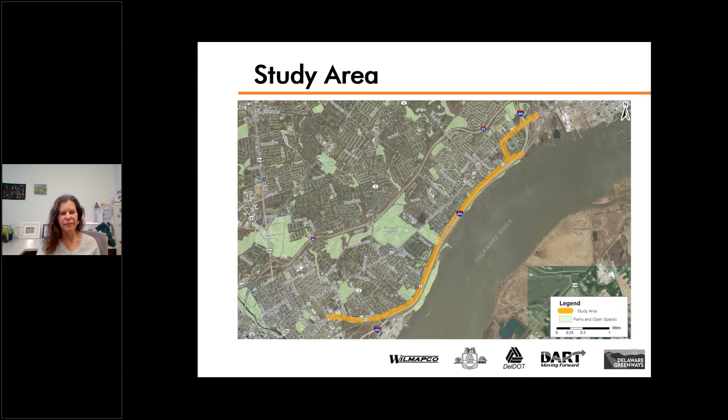WILMAPCO is the managing agency for the study, but we're certainly not doing this alone. We're working in partnership with DelDOT and Delaware Transit Corporation, the transportation providers along the corridor. New Castle County Department of Land Use is part of our team as the land use agency for the area. And Delaware Greenways is part of this, with an interest in connecting the East Coast Greenway through the corridor, as well as possibly connecting Fox Point State Park and Bellevue State Park by walking and biking.

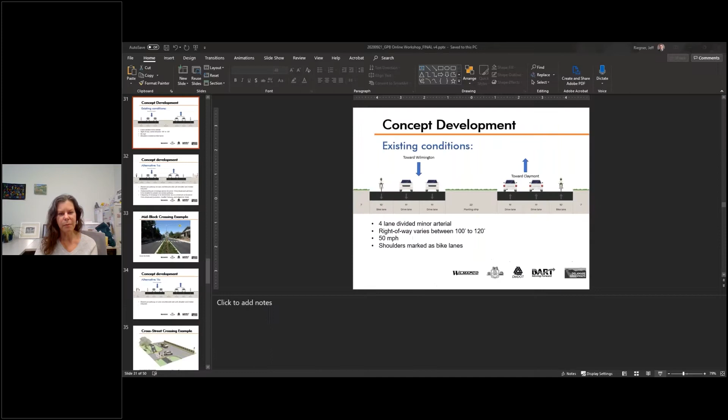We're also coordinating with other organizations working along the corridor, such as regional civic associations, Chamber of Commerce, East Coast Greenway, and municipalities along the corridor. But most importantly, we're coordinating and reaching out to people who live, work, and own property in this area. We're doing this through an advisory committee made up of all these different groups, as well as through public workshops.

The purpose of the study, basically, is to look holistically at the study area to see what the corridor's current and future needs are, and then develop recommendations that will address these future and current needs. We're using your feedback as well as technical analysis to look at what the options are for meeting those needs and what are feasible and best meet the community's interests.

We've been at this for a while now. We began our process last summer, looking at current conditions and existing issues along the area. Then we had a community visioning process that included a November bus tour with the advisory committee. In January, we held a public workshop, and many of you were there. It was wonderful. Then in February, we had an online survey to follow up from the public workshop.

Since then, we've been working to identify some initial options for analysis. We took a further look and refined the options, and we'll be presenting those options to you tonight for your feedback. After that, we'll use your feedback to select the preferred concept and develop a final report that will be available later this fall. With that, I will turn it over to Leah Casanda, who is part of our consultant team, to talk more about what we heard through the outreach process.

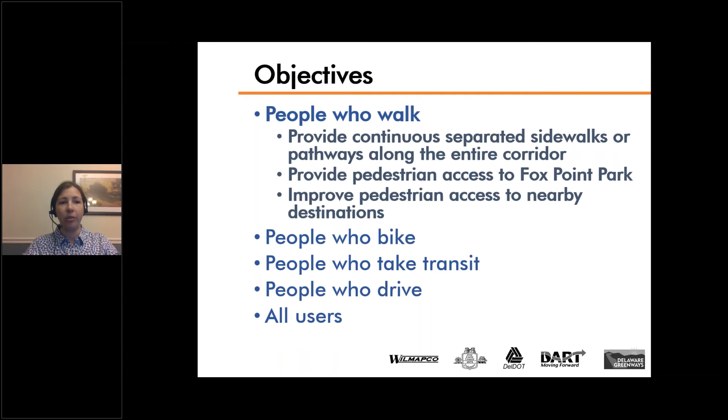The information from the first meeting and the February survey, including the presentation, boards, and feedback, are available on the project website. Based on the feedback received at the public workshop, from the online survey, and from members of the Advisory Committee and Management Committee, the following objectives were developed for each user group. Objectives for people who walk include providing continuous sidewalks or pathways along the entire corridor, as well as access to Fox Point Park and nearby destinations.

Objectives were similar for people who bike: providing low-stress bike facilities or facilities physically separated from traffic along the entire corridor, as well as improving access to nearby destinations.

For people who take transit, the objectives are providing additional bus stops and shelters along the corridor, as well as improving access to the Claymont train station.

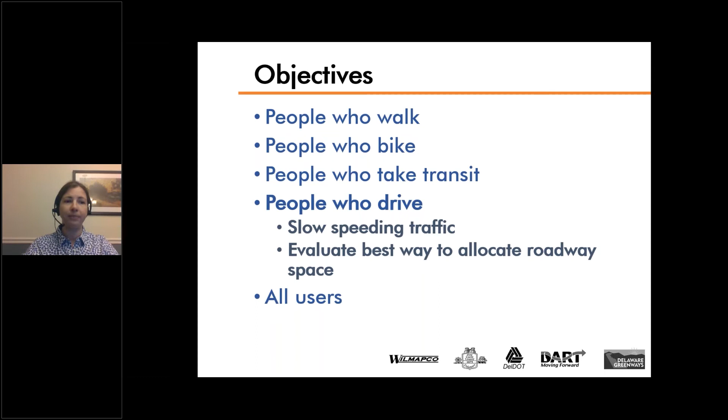For people who drive, we're looking at speeding traffic and determining the best way to allocate roadway space. And lastly, objectives for all users include improving lighting, greening the corridor, and improving stormwater management.

Now Mike will share the alternatives that were developed to meet all of these objectives.

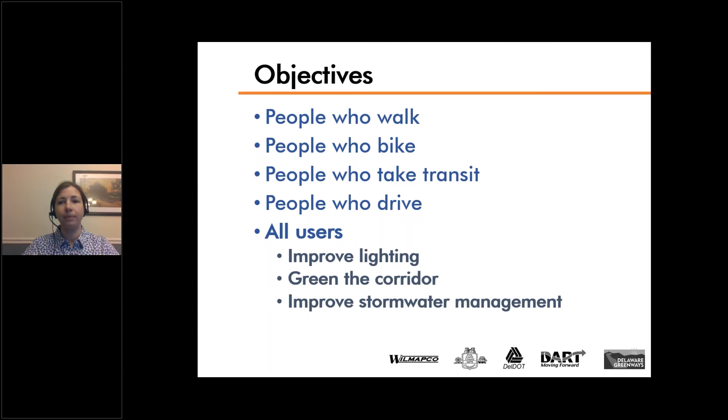Thank you, Leah. Good evening, everyone. My name is Mike Campbell, I'm a landscape architect with WRA, and I'd like to briefly walk you through the existing conditions and the alternatives that have been developed based on the feedback we heard during our first public workshop.

As Heather described, our project area extends from the city of Wilmington limits at the southern end of the corridor to the new Claymont Transportation Center to the north via Governor Printz Boulevard and Philadelphia Pike. The total corridor is a little over 6 miles long and is flanked by a mixture of residential, commercial, and retail land use to the west and I-495, Amtrak, and the Delaware River to the east.

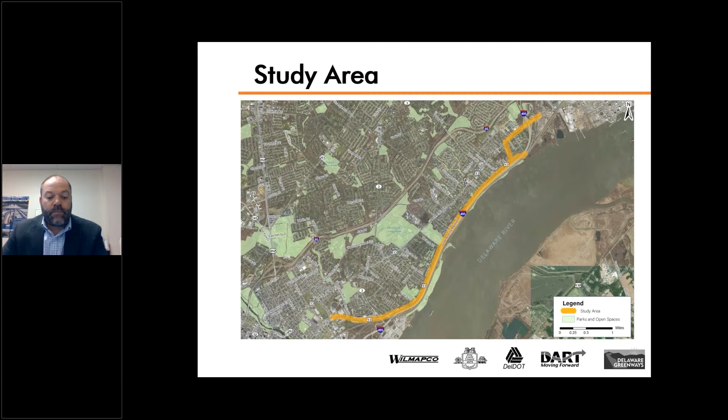There are existing sidewalks scattered along the corridor, however there's not a continuous pedestrian connection. The shoulders vary in width and are marked as on-road bike facilities in both directions for the entire length.

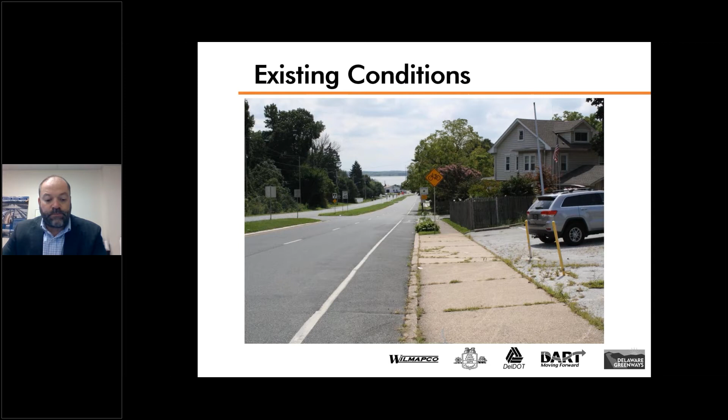Governor Printz Boulevard is a divided roadway by a grass median which varies in width and provides left turn lanes and vehicle crossings for northbound traffic. There are extensive overhead and underground utilities throughout the corridor, which have been considered in the development of the alternatives.

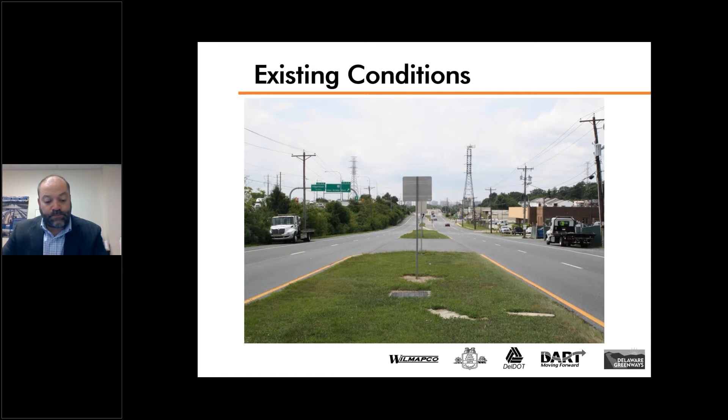There are many destinations along the corridor, including the retail shopping at Merchant Square. This shopping center currently has one of the few grocery stores accessible to residents in Northeast Wilmington and the Bellefonte neighborhoods.

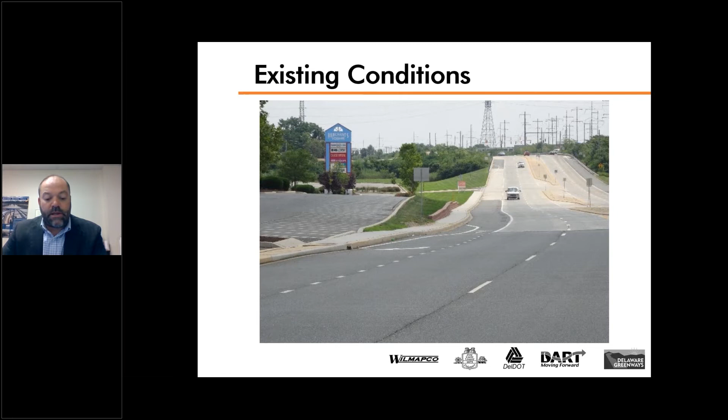There are many planned projects adjacent to and directly within the corridor that were taken into consideration during the development of the alternatives. Several of these projects will create new destinations and increase demand for alternative transportation options. While we know what the specific impacts to the corridor will be for some of these improvements, others, such as the port development, are still being planned, and there may be opportunities to incorporate recommendations from this study.

As Leah described, one of the key considerations we heard from the public is the importance of making a direct connection to Fox Point Park. Fox Point Park is a 100-acre state park situated along the west bank of the Delaware River. The park offers scenic views, wildlife views, picnic areas, playgrounds, and if you haven't been there when a large container ship is coming up the Delaware River, it's quite impressive.

The park is an underutilized asset due to the remote location and is virtually only accessible by car. As part of this study, we looked at two potential feasible connections, one at Stoney Creek and the other at Edgemoor Road, which both have significant challenges.

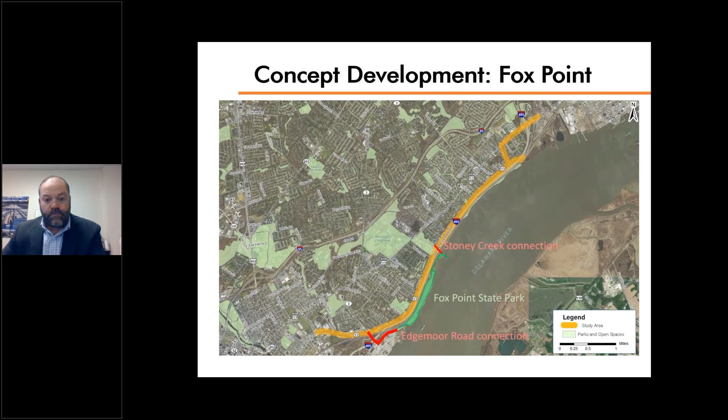Stoney Creek is a small tidal tributary to the Delaware River located just north of Cauffiel Parkway. The creek is spanned by several major transportation entities, including I-495, Amtrak, High-Speed Rail, and Norfolk Southern Freight Rail. While some of the overhead structures meet trail standards, which require a 10-foot minimum overhead clearance, many of them would require significant excavation. In addition to the extreme difficulty of just coordinating with these major transportation facilities, the largest challenge we see is the narrow opening you see here at the mouth of the creek.

Being tidal, the trail would flood twice daily, requiring significant signage or possibly digital flood monitoring stations to alert users of the potential hazard.

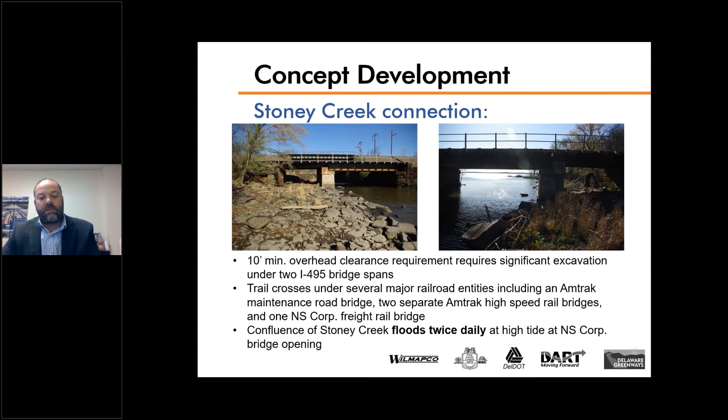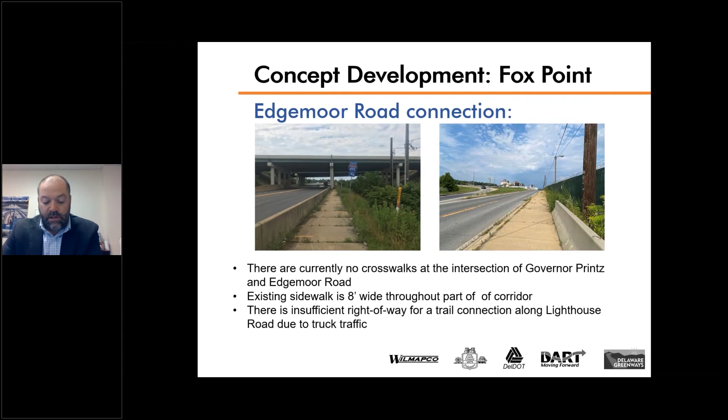The second connection at Edgemoor Road also has significant challenges. While the connections from Lighthouse Road to Governor Printz Boulevard require relatively minor improvements, the primary challenge is the limited right-of-way along Lighthouse Road, which creates an unsafe area with heavy truck turning movement and storage. The at-grade skewed railroad crossing also limits the ability to provide safe pedestrian access to the park.

The alternative shown here would provide direct access from the proposed pedestrian and bicycle improvements on Governor Printz Boulevard along a widened sidewalk on Edgemoor Road to a new off-road connection shown in purple on the west side of Lighthouse Road. To avoid I-495 ramp conflicts, railroad right-of-way conflicts, and truck movements, this section is either proposed to be an elevated structure extending on the east side of Lighthouse Road or potentially looping around the west side of the asphalt plant as shown in orange.

A new perpendicular at-grade crossing of the railroad to the north would allow safe access to the park. As you can see, there's a reason why this pedestrian connection has not been done before. It's very challenging.

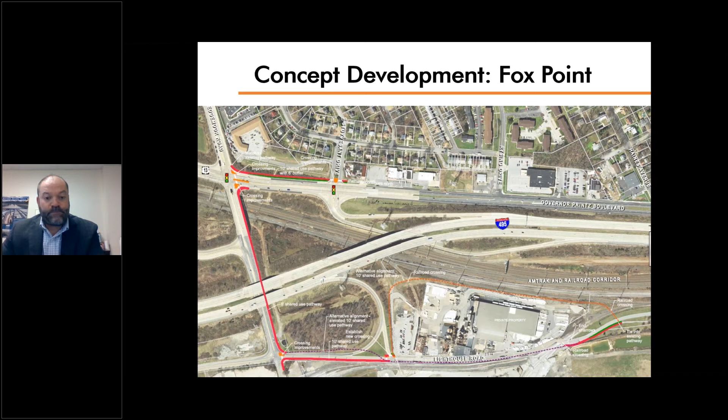Okay, so now's the time everyone should really pay attention, as there's going to be a short poll. We'll be asking the audience for their feedback following the presentation of the Governor Printz Boulevard alternatives.

As a quick recap, the existing condition of Governor Printz Boulevard is a 4-lane divided highway with a right-of-way varying between 100 to 120 feet wide. There are paved shoulders on both sides of the highway, and the grass median varies in width. There are 3 alternatives developed with variations that show improvements on both the northbound and southbound direction.

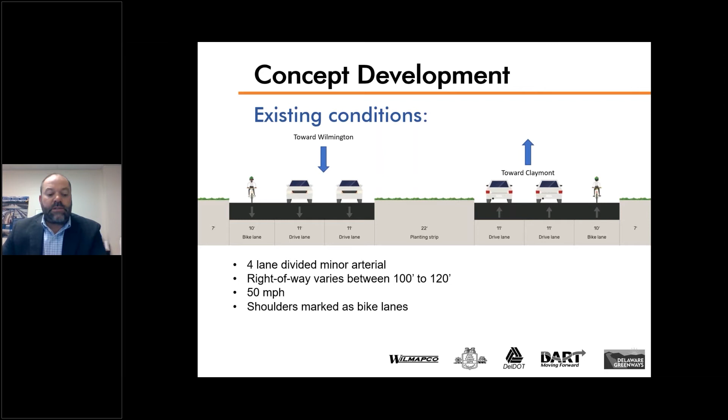Alternative 1A maintains 2 lanes of traffic in both directions, shoulders marked as bike lanes, and a new shared use pathway on the northbound side of the roadway. This alternative minimizes conflicts with vehicles. However, the trail will only be accessible by designated crossings of Governor Printz Boulevard. In addition to the trail, a sidewalk connection on the southbound side would provide additional pedestrian connections. This alternative requires a conversion of a portion of the median to new roadway.

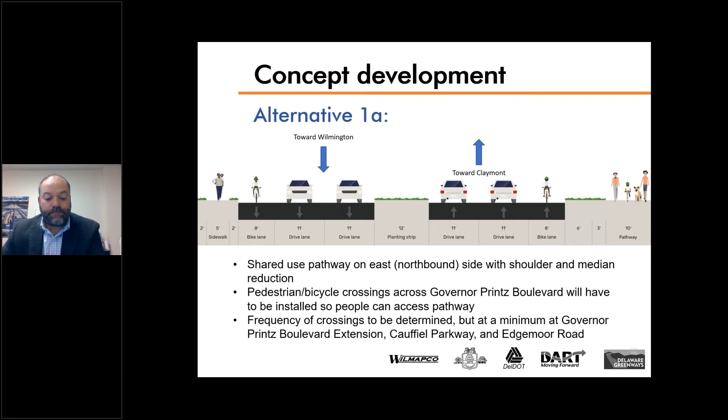For this alternative, the addition of enhanced pedestrian crossings will be evaluated for key unsignalized intersections such as Cauffiel Parkway.

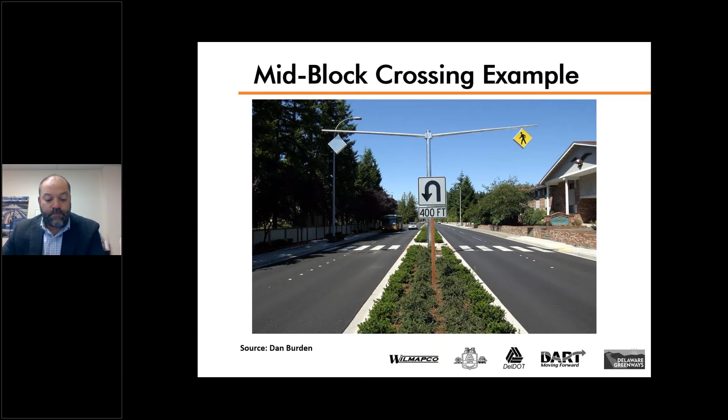Alternative 1B also maintains 2 lanes of traffic in both directions, with shoulders marked as bike lanes. However, the shared use path is located adjacent to the southbound travel lanes. This alternative also requires a median reduction and new roadway construction. Because the pathway is on the southbound side, it is more accessible to the adjacent land uses. However, it also creates more conflicts between path users and vehicles at roadways and driveways.

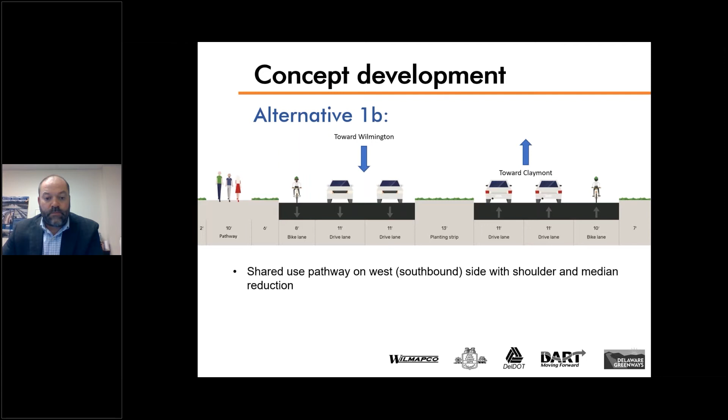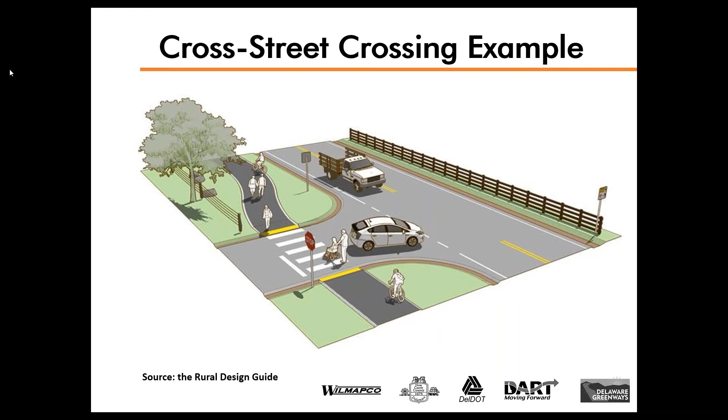Some of the pros and cons of alternative 1A and 1B: Alternative 1A provides direct access to Claymont Transportation Center as well as Edgemoor. However, users have to cross Governor Printz Boulevard to access the pathway. Alternative 1B provides direct access for more users. However, there are 57 driveways and 26 unsignalized intersections that increase user conflict between vehicles and pedestrians.

Alternative 2A is a lane reduction alternative that relocates both travel lanes to the southbound or west side of the roadway. Similar to alternative 1A, the shared use pathway would be on the northbound side with ample room for larger buffer and opportunities for additional trail amenities or even separated pedestrian and bike facilities.

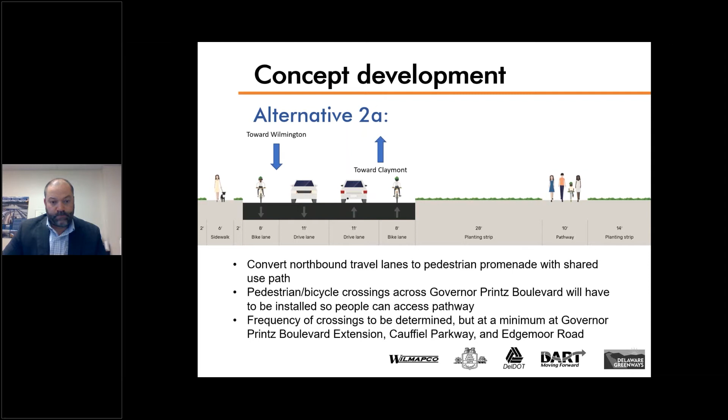Alternative 2B is also a lane reduction, but the shared use path and potential pedestrian promenade would be adjacent to the southbound side of the roadway. This would allow direct access and eliminate having to cross the boulevard. However, there would be significant improvements needed to address the high number of user conflicts with adjacent roads and driveways.

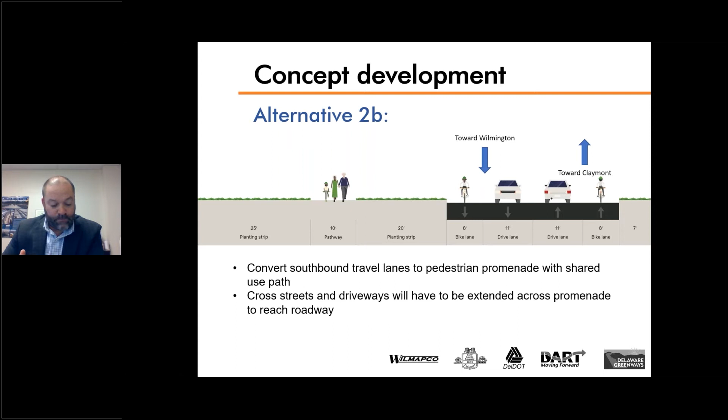To recap alternatives 2A and 2B, they have the same pros and cons as alternatives 1A and 1B, with similar accessibility and user conflicts. However, 2A and 2B are relatively lower cost to implement due to not requiring new roadway construction.

The final alternative is also a lane reduction in both directions. This option provides a shared use path on both sides of the roadway and maintains existing median and left turn lanes. Similar to other alternatives, the shoulders would be maintained as on-road bike facilities. This alternative maintains the wide boulevard feel for drivers and pedestrians alike.

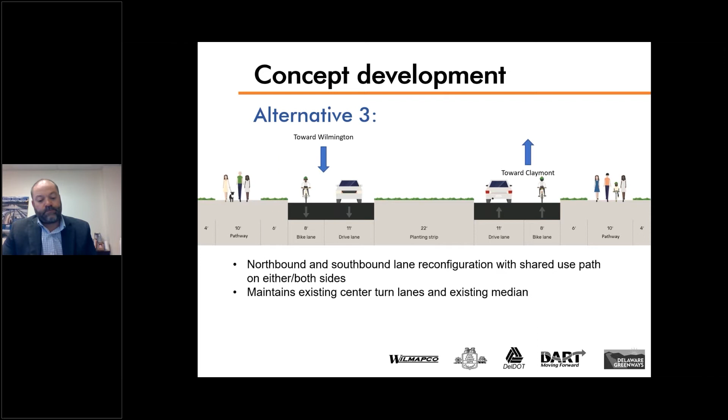Alternative 3 creates enough space for pathways on both sides of the roadway. This allows walkers and people who ride bikes to use the west pathway for short local trips and the east pathway for through trips or recreational rides. Crossings would still be required at major intersections.

It should be noted that alternatives 2A and 3 have the potential for a low-cost interim implementation, which would allow the project to be implemented on a much faster track.

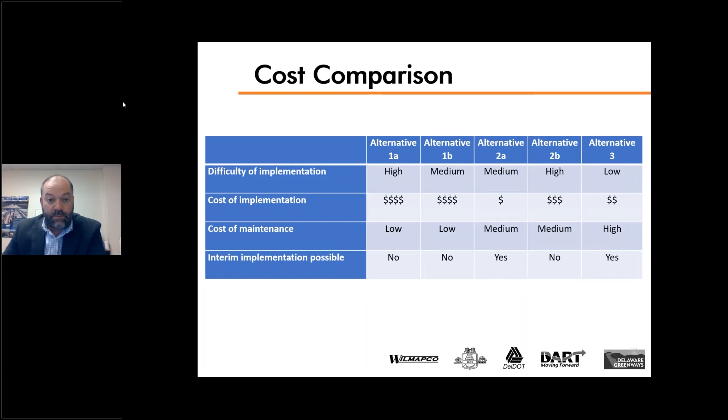Another factor that had to be considered as part of the alternative development is the impacts to traffic. Using existing traffic data and new traffic intersection counts, we were able to determine the travel times for morning and evening commute during the peak hours.

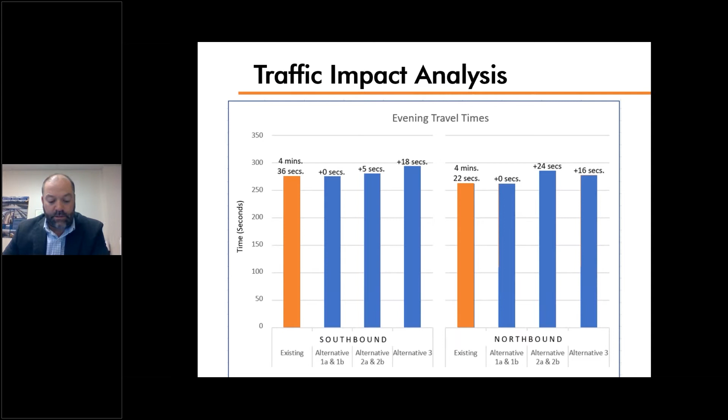Thanks, Mike. I'll encourage all of you attendees to take a close look at this. I'm going to zoom in a bit on the next slide to the proposed alternatives. As Mike described in some detail, alternatives 1A and 1B both retain 2 lanes in each direction plus a shoulder that acts as a bike lane, as well as a shared use pathway.

Alternatives 2A and 2B provide 2-way traffic along one side of existing Governor Printz Boulevard, and a shared use pathway on the other side. Alternative 3 provides one lane of travel plus a shoulder or bike lane in each direction, and shared use pathways on both sides.